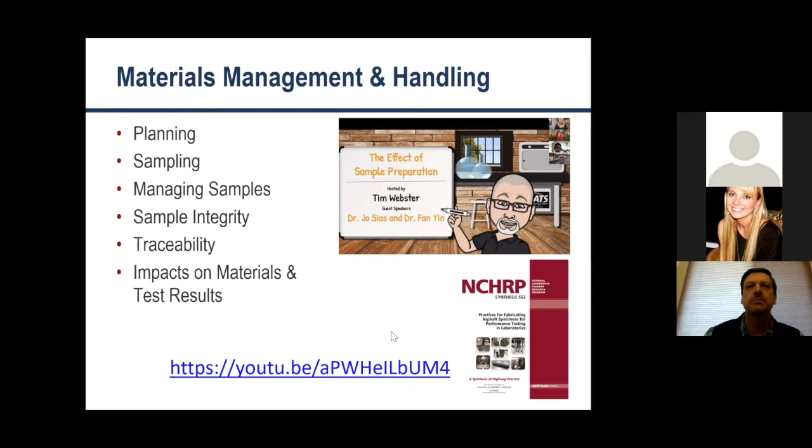So when we talk about planning, which was the first item on that list, you got to think about the material you're using, why you're sampling it, what's the purpose of getting the sample, where you're going to sample, the size of the sample. Is it a QC sample and it's a gradation from a belt cut, or is it a stockpile, several bags of stockpile aggregates for mix design?

The process that you're going to use, you want to make sure that your samples are randomly selected and that they're representative of the material that you're ultimately going to test in one form or another, or use to fabricate test specimens. And then once you've got those samples, obviously splitting them, getting them into whatever containers you're going into, or from containers into the test specimen sizes, and keeping everything labeled along the way so that there's some traceability associated with the samples.

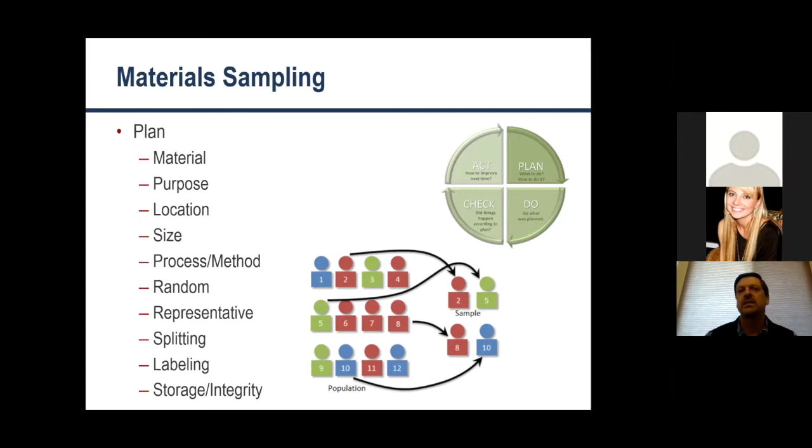And then finally, storage and integrity of those samples. And something that's a really good tool is what I call ITPs, or inspection and test plans.

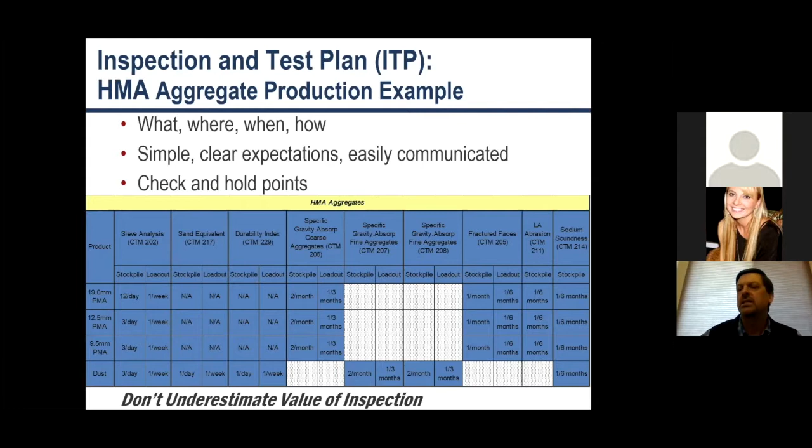And this is an example of one for aggregates. These are aggregate sizes here, different products. These are tests, and so what this simple table does is it summarizes what's going to be sampled, where it's going to be sampled, when, because you got a frequency in there, and then how. So it's a great tool to summarize all that and make it really clear to communicate what's going to be done in terms of sampling.

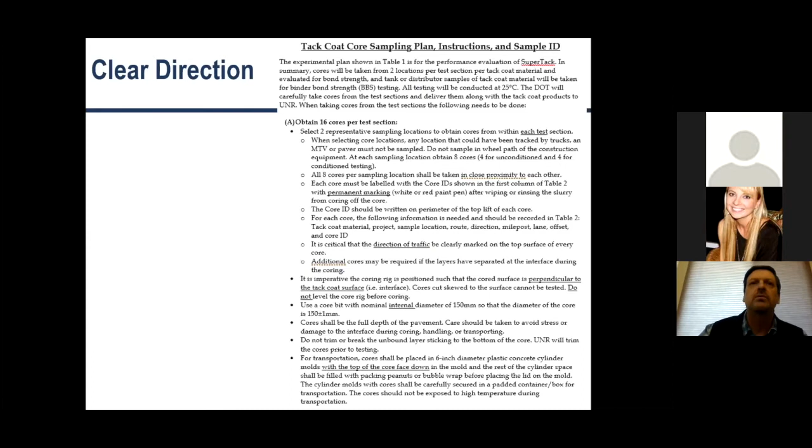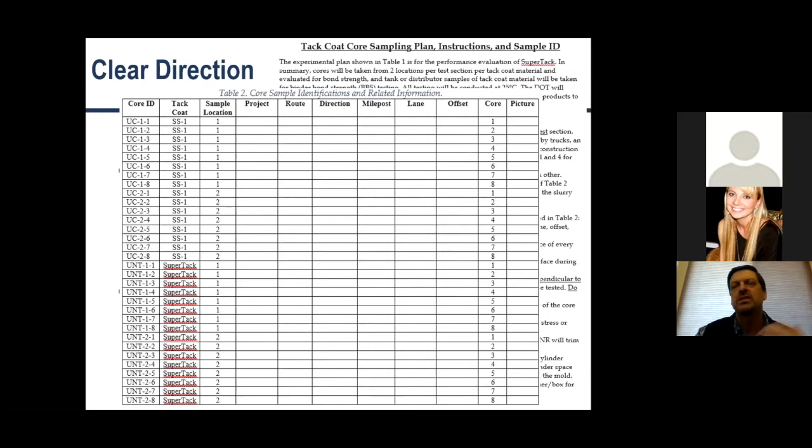And I don't want to go through this. Just the idea is sometimes a table like that is really all you need, as opposed to this situation where you need more direction than that.

Acceptance would be what the public agency or the owner would be using to accept the material. Let's say in this example we're looking at the gradation of hot mix asphalt. The agency or owner might be using mix on discharge from the drum, samples from a truck on load out, from the silos on unload into trucks, or maybe even out at the project.

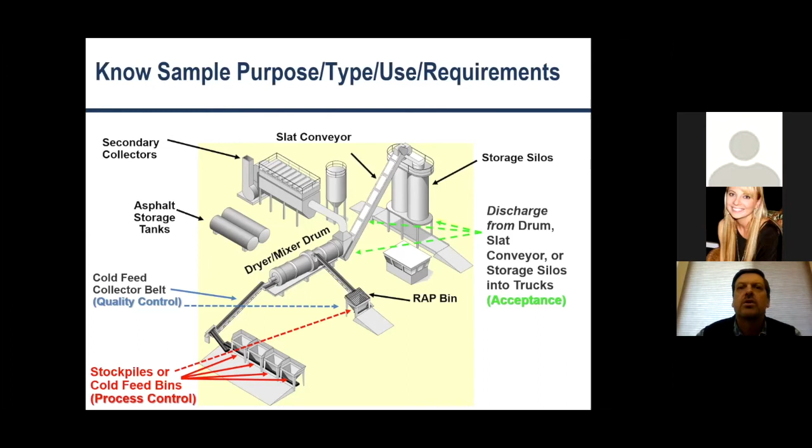So you might also, for example, on an acceptance and quality control test, it's really important that you follow all the details of the test methods that are specified, whereas a producer on their stockpile samples may be doing something to accelerate the drying process of the aggregate, to get quicker answers, especially at the start of the day.

Now, the Code of Federal Regulations, 23 CFR 637B, states that if on a project the contractor is performing quality control and the agency or their representative is performing acceptance tests, the samples used by the contractor and the agency or the DOT have to be independent. And this slide is an effort to illustrate that.

So this would be a pavement. Up at the top here, we've got a pavement, and 5 cores have been taken out. So 5 random locations were identified, 5 cores were taken. Now those cores include 4 sources of variability: materials and process—I usually call that materials and construction—sampling, and testing variability.

Now, if you use split samples, which is illustrated on the bottom part of the slide, same idea there. You've got a pavement, and in this case, 4 samples are taken, and the one on the far right is split into 2. Cores aren't really a good example of this because you don't really split cores. But if those were loose mix samples, then that split sample only really integrates testing variability.

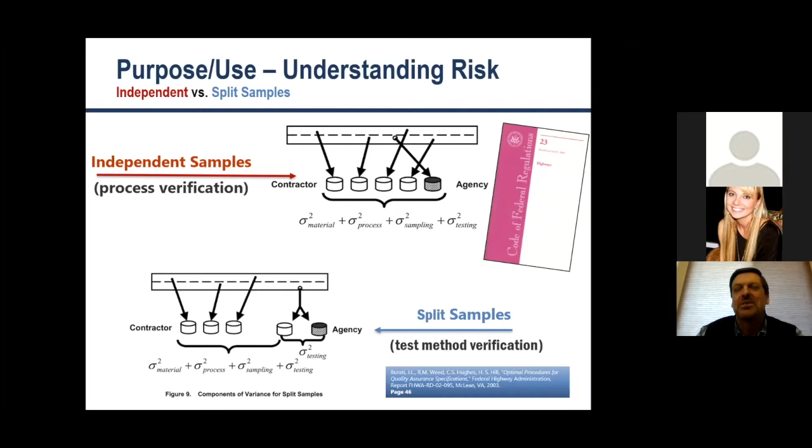I don't know how many times I went to pre-construction meetings and there'd be an agreement between the RE and the contractor to go ahead and have the contractor pull samples and split them for the agency and for the contractor, when they were really supposed to be pulled independently. So the other thing is, again, making sure we've got representative samples.

If you do your random number generation and get your sampling locations, if there's some issue there when you go to sample, you need to recognize that and maybe do something different. Get with the RE and make sure everybody's on the same page, but make sure that you don't intentionally get a sample that's not representative.

And of course, you need to be thinking about your purpose and use. I've got some examples listed here: mix design, process control, quality control, acceptance, and research. The question posed: what might be different based on use?

For mix design, you're going to get a pretty significant, pretty large sample—several bags or buckets of material. Where with a process control, let's use QC since I used the cold feed collector earlier, you're going to get a much smaller sample.

You want them both to be representative and randomly taken. Now, when you get to something like research, you may want to get a very, very large sample. You don't want to start a research project that might be influenced by aggregate variability and aggregate properties, so sample stockpiles at a contractor's or producer's yard three times during the project, three months apart, because there will be some variability there.

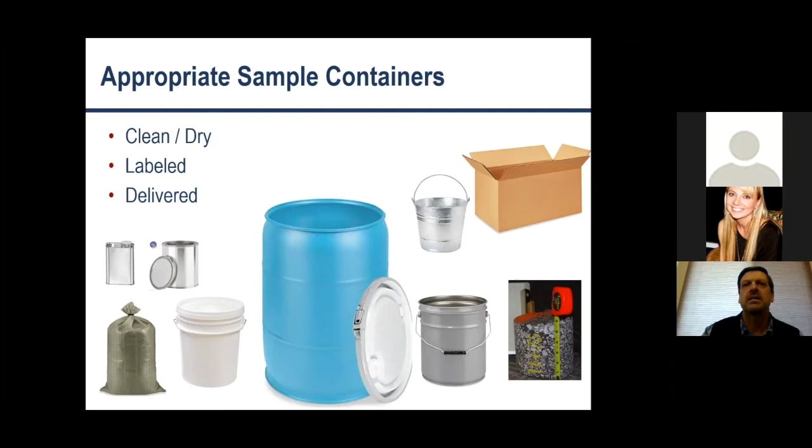Now, sampling is—there's safety, or can be safety issues with sampling. It's just a reality. Depending on whether you're on the job or maybe at a quarry where a plant is, you have either OSHA or MSHA as the bodies paying attention to the practices being used, and they're there for a good reason—to keep everybody safe.

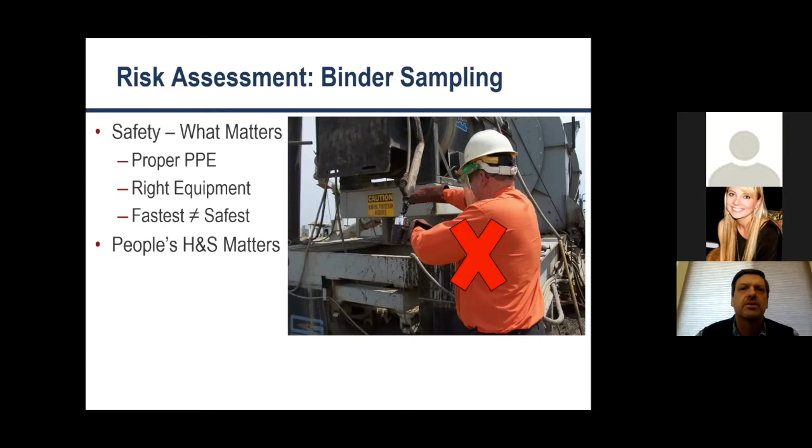So the purpose here, to start with, is when it comes to safety when you're sampling, you have to have the proper PPE, the right equipment. The fastest method isn't always the safest. You really need to think about that, because at the end of the day this is really about the health and safety of the people doing the sampling. You want everybody to be as safe as possible. So that's a not-so-great example.

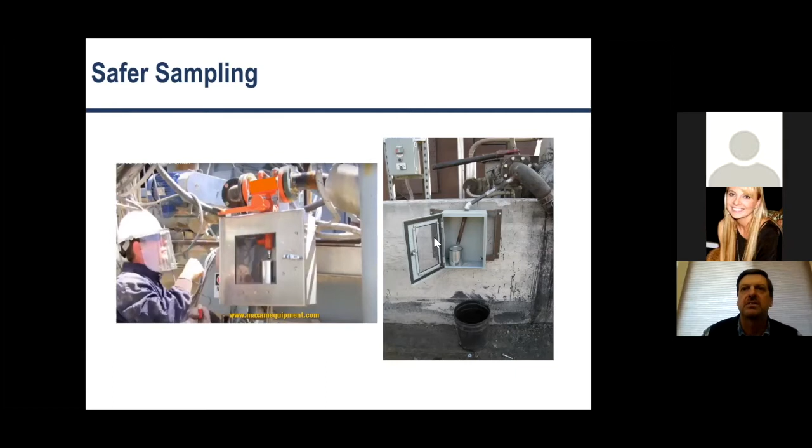Here's a couple of examples that are much better. You've got your sample container inside this box. The person sampling has the proper PPE on, and as long as they don't open the valve with that door open, they don't really have the opportunity to get burned anyway. Again, this is a Maxam device—this one is homemade, built before these were available.

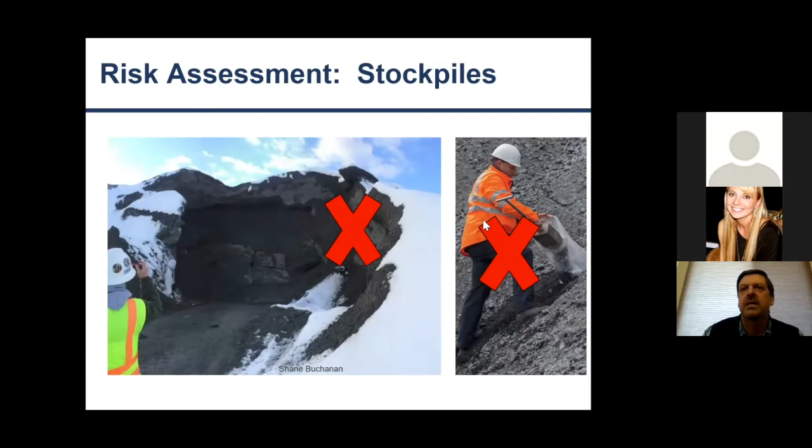This is a vertical face and a wrapped stockpile. This is a person sampling on an almost 150-ton stockpile of base course. The person's climbing on it, so those are things we don't want to do—we don't want anybody sampling that way. They could get buried, and we don't want a person getting buried climbing on a pile either.

So we've got loaders, right? At our plants we've always got loaders, and a loader operator can go blade down the face of a pile and make a smaller pile to sample from, in a much safer manner.

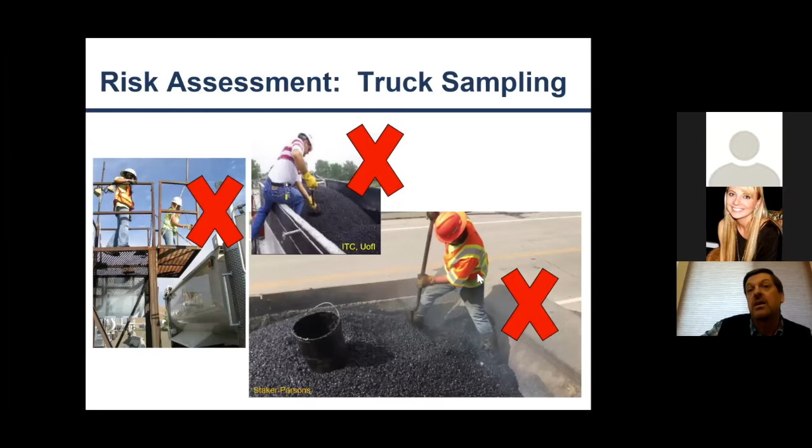I'm aware of drivers taking off with folks standing in the back of trucks, like in this scenario here, where the person's leg is up against the tailgate, and the driver actually takes off, and the person fell out of the back. Fortunately, they weren't killed, but it can be really, really dangerous.

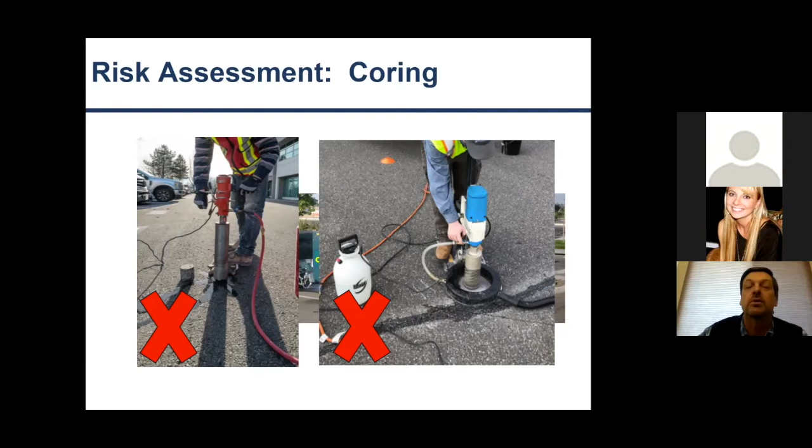This is probably one of my pet peeves also, and that is coring safely is really important. Because if you use these little core rigs like this, the operator has to stand on them to keep them in place. If they bind up, if that core barrel binds up and that drill keeps going, it's going to try to spin. And the operator can get twisted up in that. I had somebody that worked for me have that happen to him, and he ended up with several broken bones, and actually ended up leaving the industry.

So again, there's better ways to sample, safer ways to get cores than that. Here's just a couple of examples. So I'll get off my horse on safe sampling practices. Again, the idea is about keeping everybody safe.

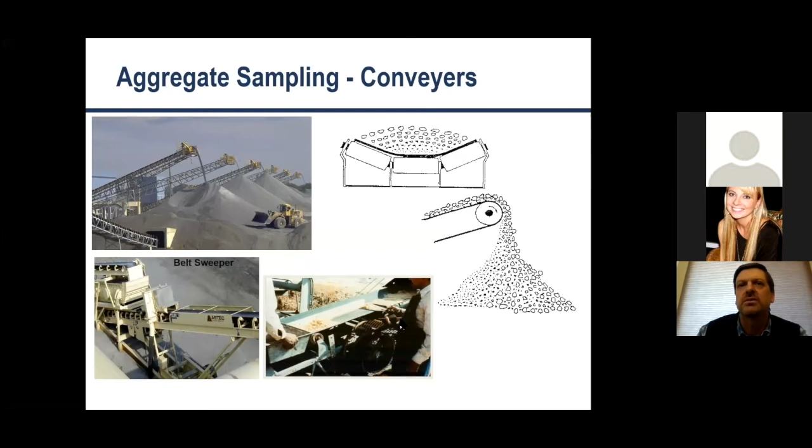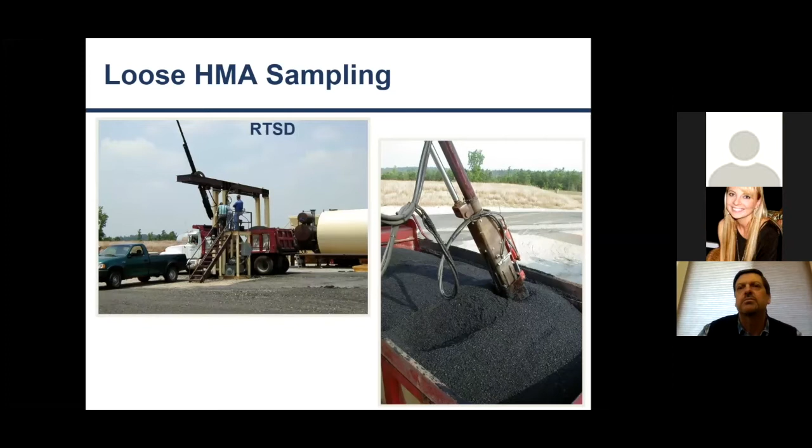This is a remote truck sampling device. These are, I think, really good tools from a safety perspective. They keep everybody out of the truck. They're quite expensive, and because of that, I think there are fewer of them out there than there could be or should be. But it is a good technique.

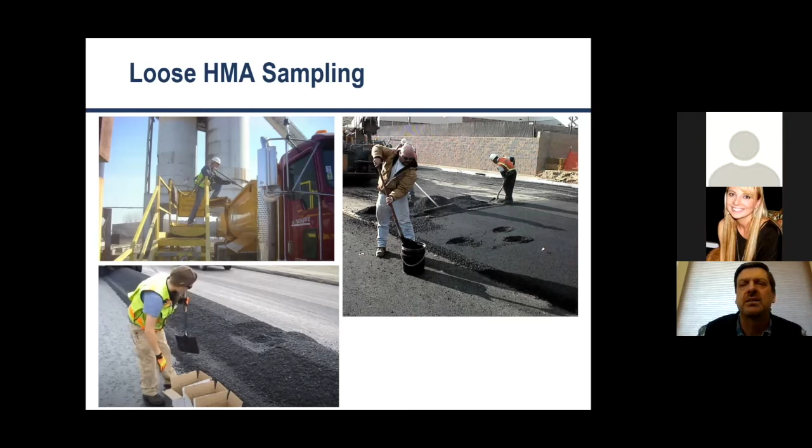Sometimes I've seen samples taken from hoppers of pavers. I personally don't like that from a safety perspective, but there again, location matters. The point here is we've got different locations, and locations matter.

Of course, anytime you're sampling, it's really important to keep records. Depending on your situation and the type of sample you're taking, the record requirements might be different. The intent here isn't to go through all the different types, but just to recognize that you need to be recording what is done, where it's done, when it's done, who did it, and how it's done.

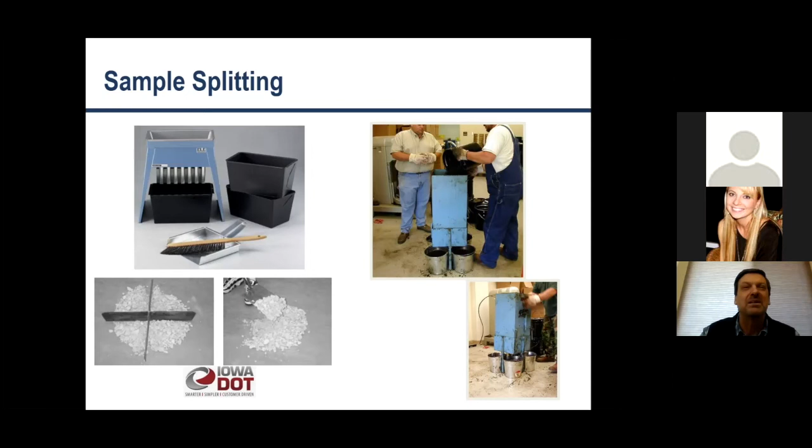Now I brought up the sampling location, and I'm going to use a quick example here to illustrate the importance of it.

We saw in the slide where we're looking at independent versus split samples that there are multiple components of variability. So the total variability is made up of variability associated with sampling, associated with the test method being used, and material and construction - some folks will use material and process.

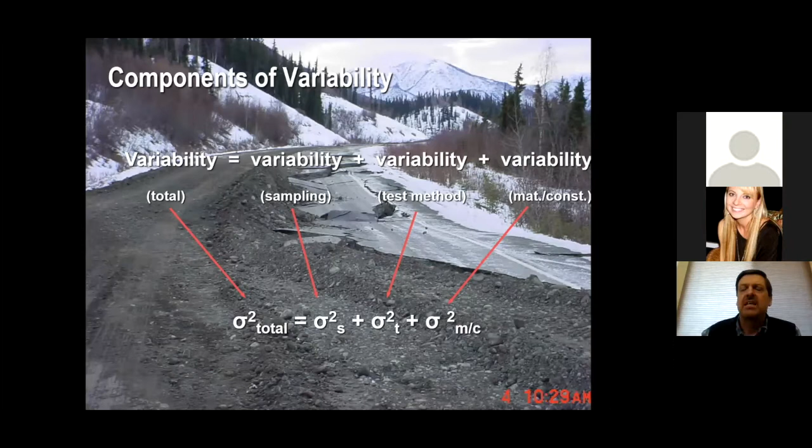But at any rate, what I want to illustrate is the impact of different sampling locations. This goes back to some work done around the AASHO road test, and it was determined that 10 to 30% of the total variability in a test result will be due to sampling variability.

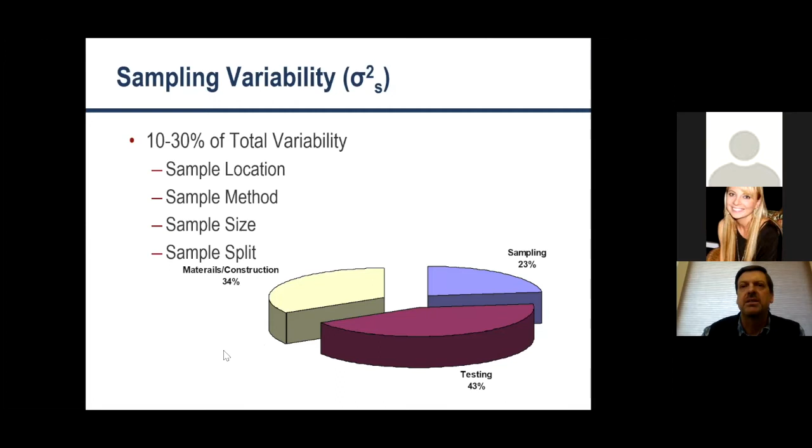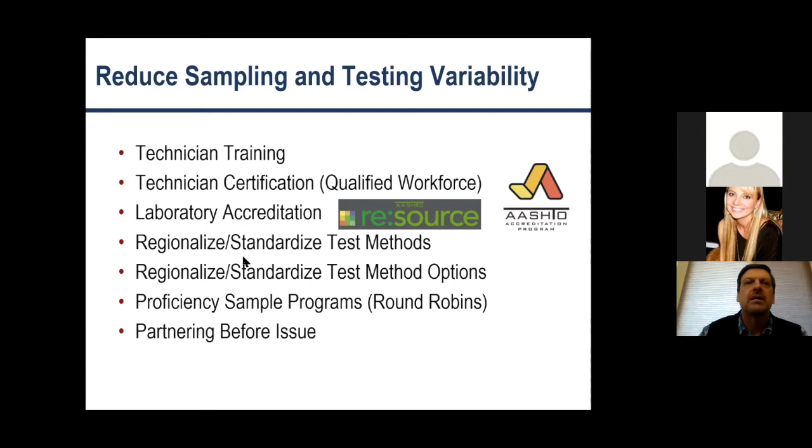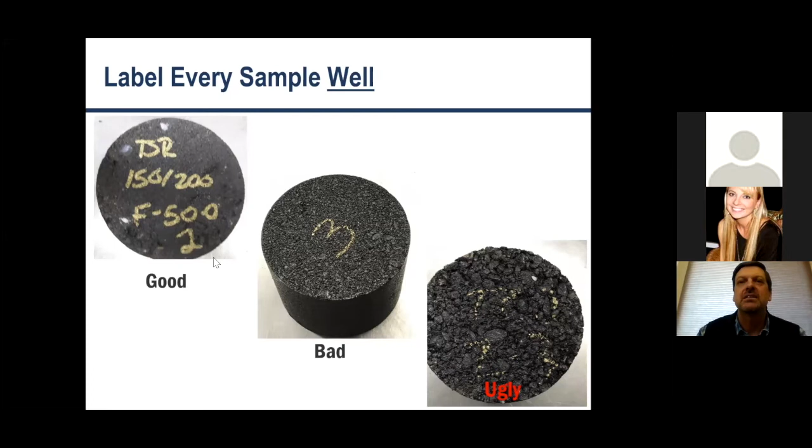Now, one of the things that's really important when it comes to sampling is storage—how you handle the storage of the samples. It's particularly important with hot mix, and obviously emulsions too, since I haven't really talked about emulsions, but they have such a short shelf life.

One of the things I've seen many times be an issue is that when you sample hot mix and there are two parties testing it, one party might take that truck sample and immediately go do their volumetrics while it's hot—they don't have to reheat it. The lab's right there, they go in, split out a rice sample and a couple gyratory samples, compact them, and they're done.

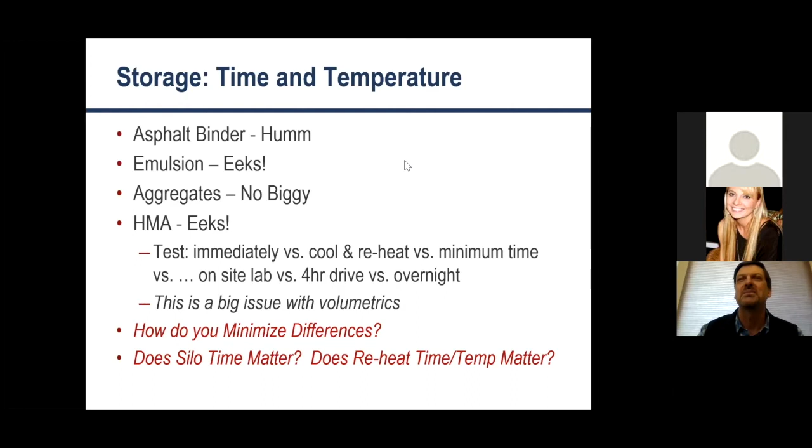It's a really big issue. So thank you for the question - hopefully I answered it. If not, please shoot another one at me.

Now, when we prepare - it looks like there's another question there. This procedure is for use in Panama City. Okay, great.

If there's not a standard used for the city, I would encourage you to grab one from somebody else, another agency, share it with the city, and get them to agree to some standard. You're going to see different standards around the country, but what's really important is that one is picked and consistently used. The differences often occur because in different parts of the country you may have very absorptive aggregates versus aggregates that aren't very absorptive, and the importance of this is even greater with more absorptive aggregates.

Now, for our volumetric and performance test specimens, we spend a lot of money preparing them, especially performance test samples. So we want to make sure the integrity of the materials we've taken is good when we go to fabricate those. If we take loose hot mix, put it in boxes, and store it in a storage container in, say, Florida in summertime for a day versus 3 months, we're going to get differences in the properties we measure with our test. So controlling the temperature and the time is a really important part of the integrity piece.

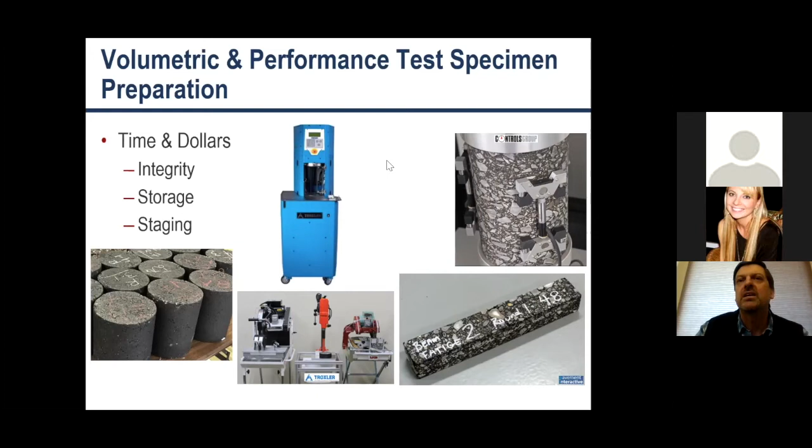Again, if you're making - there's an AMPT sample in the upper right corner and a beam fatigue sample in the lower right - if you're fabricating those samples, you're spending a tremendous amount of time and money to prepare them. So if the integrity of them isn't very good, then it's wasted money.

There's something called thixotropy, which is basically binder essentially stiffening when it's not moved. So if you prepare a bunch of performance test specimens - even if they're properly prepared and properly stored - but stored for different periods of time, you may get differences in your test results. So you really need to stage your samples so that the amount of time from when they're prepared to when they're cut and ready to be tested is similar among each sample.

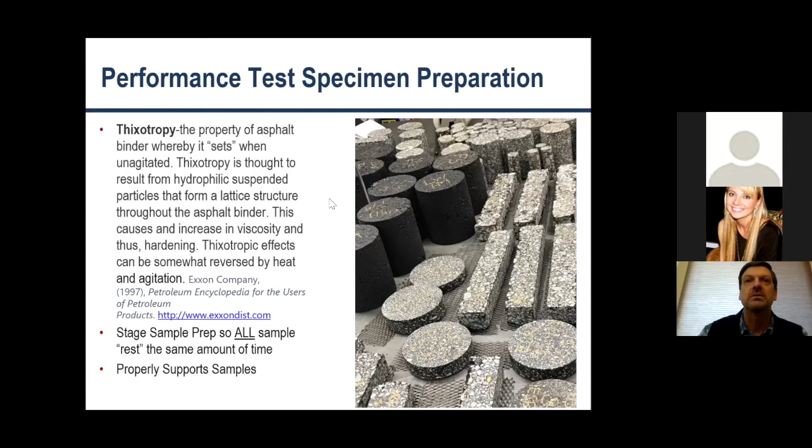Then of course there's the aging time and temperature. I already talked about the reheating with plant mix lab compacted specimens. And then one of the things with cores that's a fairly common challenge is the cores are sort of skewed, because the trailer or core rig might be set up such that you don't get cores with nice straight sides, instead you get cores taken on a skew.

One of the things I like to use or see used when it comes to sampling is control charts, because if you collect your samples, run your test, and plot the data, whether individual properties or combinations of properties, you can see what kind of variability you have in your test results, and look for sampling, splitting, and testing variability as potential sources of variability in your combined results.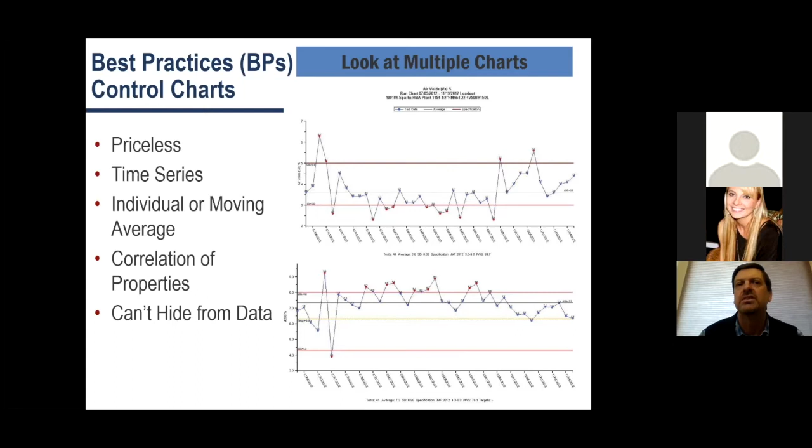With control charts, or plots in general, you can do things like plot the number 4 or number 8 sieve versus asphalt content. That will tell you if you've got segregation in your samples.

You can also plot your asphalt content versus your GMM. As your asphalt content goes up, is your GMM changing in the right direction, up or down? You can plot your effective specific gravity, which tells you something about your absorption or whether your aggregate properties are changing. So I like using GSE and effective binder, and the number 4 or number 8 versus asphalt content in particular.

The questions posed here: do you use control charts? And if so, is it done voluntarily, or because it's required?

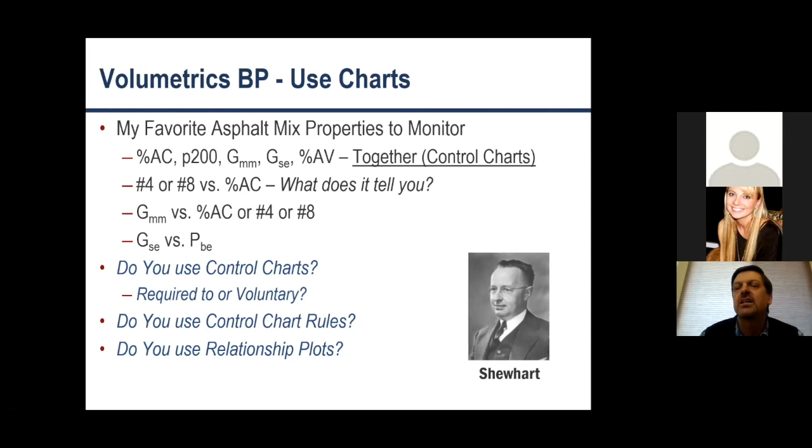And if you do use control charts, do you use Shewhart's control chart rules? He worked for Ma Bell, the Bell Telephone Company, and developed the whole statistical process control using control charts that we basically use today. If you look at Six Sigma and all that, it all goes back to Shewhart's work, and there are rules for looking at trends in your control charts and making decisions on when to change production based on that. So they're really, really good tools.

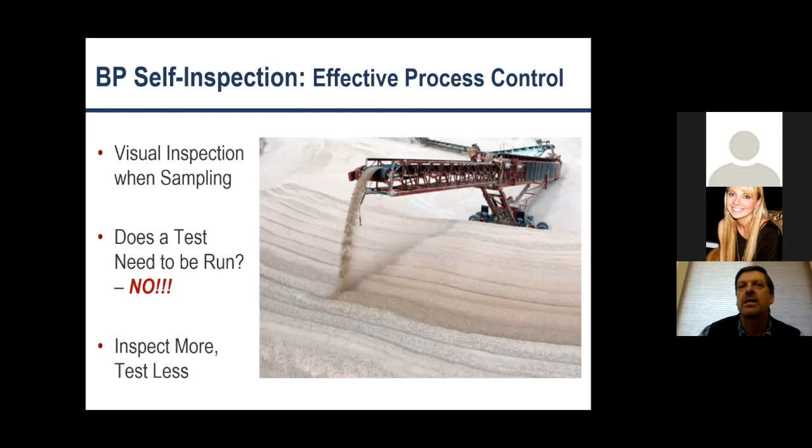I don't want to pass up the opportunity to remind us all that we go out and sample and test and collect all this information, but if you're sampling, you can be inspecting at the same time. In this example, the material coming off that radial stacker is brown, and the material beneath it is gray. You don't need to run a test to know that something's changed. That's when you go to the production folks and say, time out, the pile is gray and suddenly there's brown material being dumped on it. So what do you do? You stop, because it doesn't do anybody any good to put dirty material on clean material.

There's lots of places we can inspect while sampling. I won't go through all the locations in detail, but starting with the mine face all the way through the paving operation, we might be looking for different things in those different locations. For example, on discharge from the drum we might be looking at coating, whereas at the paving spread we might be looking for segregation.

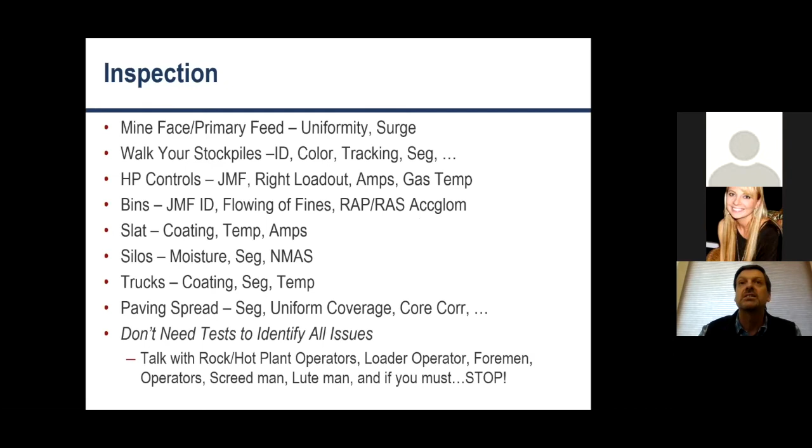Again, the idea here is if you see something, say something. It's kind of like safety. Quality to me is no different than safety. You hear all the time, if you see something, say something when it comes to safety, well the same thing goes for quality. If you have to redo something, it costs twice as much to redo it as it did to do it the first time. So you want to catch things and fix them when you can.

I'm going to wrap up with traceability, and this is a pet peeve of mine. So what is traceability? It's really having the ability to verify that you're giving your customer the product that you said you were going to give them. The reason that matters is you may be in situations where you have to prove that you delivered the right product.

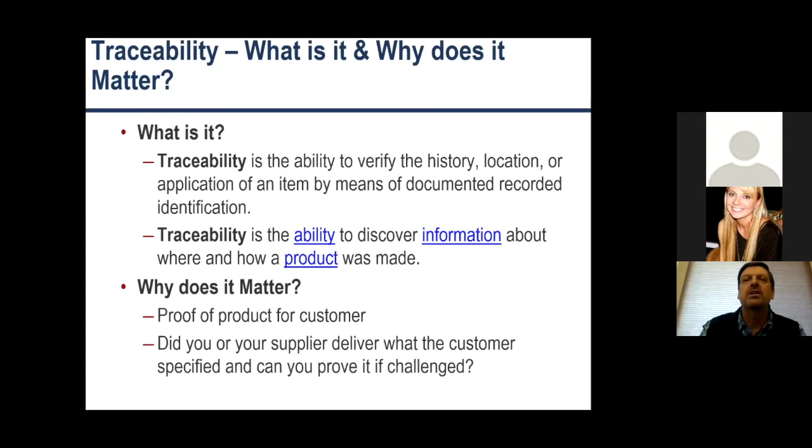I'm going to walk through an example of traceability, and I'm going to use asphalt binder as the example because it involves multiple parties, and it's a single material. It makes it a little bit easier. But when it comes to traceability...

With asphalt binder, when you're purchasing a binder, you have a specification, a purchase order, a bill of lading, a certificate of compliance, and a submittal that are all documents that can be used in terms of traceability.

When the material is in possession, you've got things like labeling on your containers. You've got chain of custody forms that might be used to transfer custody of samples from one entity to another. You've got witnessing that may go on. Of course, you may have quality control and quality assurance testing inspection.

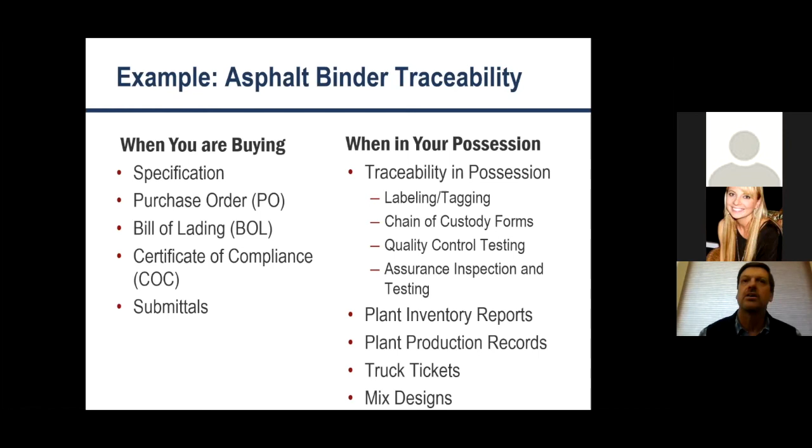And then if it's at a hot plant, if you're trying to tie the binder that was used in the mix back to a product that's a mix, you have your plant inventory reports, your plant production records, your truck tickets, which should tie your mix design back to the mix ID and your plant controls. Your plant controls, you should have the tank that you're feeding from, and then you should have all the stuff on the left relative to the binder that was in the tank.

So the purchase order is really the official agreement between the buyer and the seller. It's really important that in your purchase orders you reference a specification, because that's what you're holding your supplier to provide the material to. So it doesn't matter what state you're in, if it's a state or other public agency, or even a private owner, whatever specification they're using, reference that spec in your purchase order.

And you notice I said this, the purchase order on this was a 100 series. So this is that 100, 194, tying back to the purchase order. Now, you not only have a bill of lading, which is almost like a chain of custody, because you got signature of the recipient as well as the quantity there.

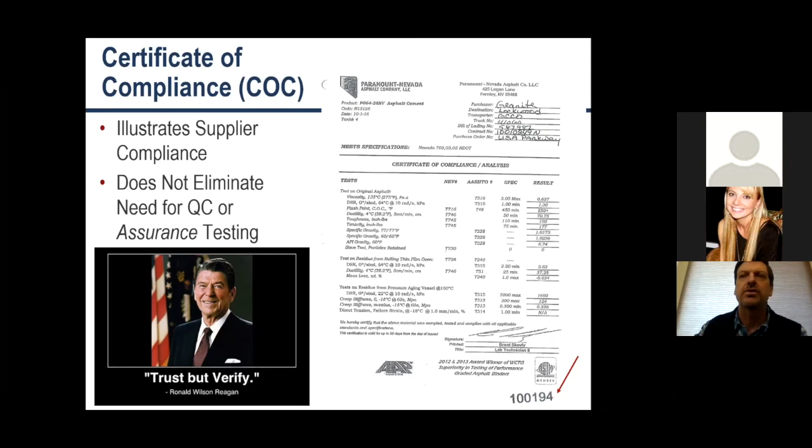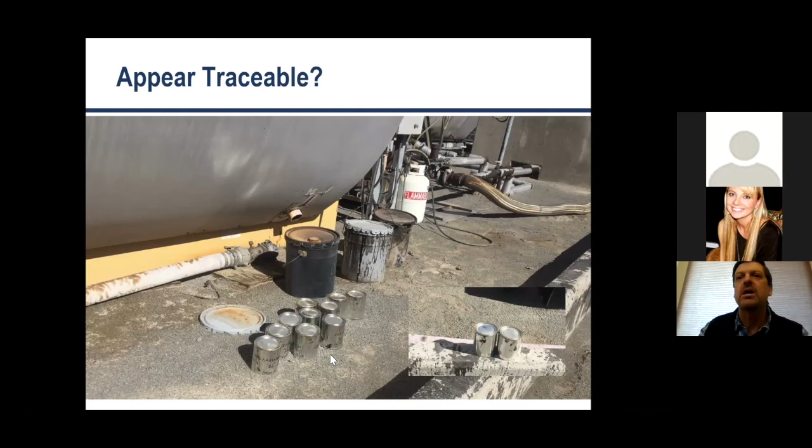These don't have anything on them. A couple of them have writing on them. A lot of them don't even have writing on them. Those aren't traceable. That's not good practice.

The other thing is keeping a log of all your samples. If you're working in an AMRL accredited lab, you know that everything that comes in the door has got to be sampled or logged. It's no different when it comes to process control, quality control, and acceptance. Logging all your samples where you've got a unique ID on the sample that's tied back to your bill of lading, your COC, and the individual sample that was taken and put in that can is really, really important. So again, it's just all part of the process of creating credibility in your traceability.